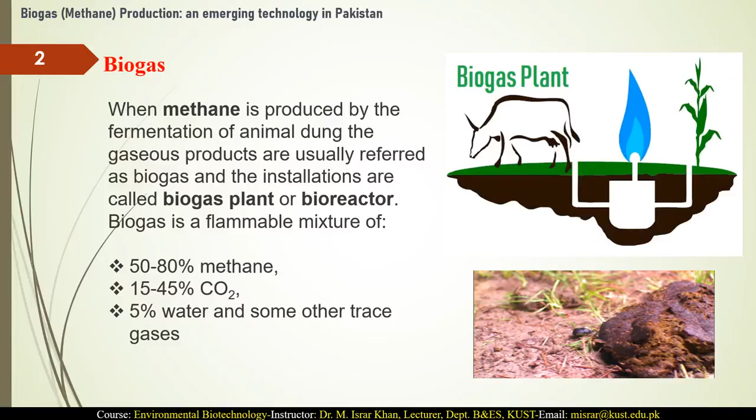So now we will talk about how biogas is used, meaning its utilization after production, specifically methane. Biogas, and specifically methane, can be burned in boilers as a natural gas, to warm water used domestically. Similarly, methane can be burned for electric and heat power production.

Methane has also been considered one of the important greenhouse gases. Methane produced domestically or commercially will be used for generation of electricity and heat for power production. Additionally, biogas after treatment can be used as fuel for vehicles.

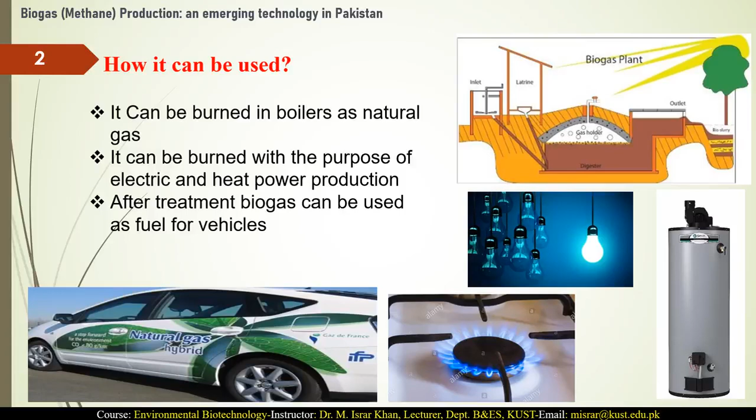As you can see in the diagram, biogas, and specifically methane, has various utilizations and functions. It can be utilized as natural gas for vehicles, used domestically for burning processes and heating, and burned in a boiler as a natural gas. So this is how biogas, and specifically methane, is utilized domestically or commercially.

As far as cows and methane production are concerned, there is a very deep correlation between cow dung and methane production, because of the methanogens. What are methanogens? These are archaean microorganisms that produce methane as a metabolic byproduct in anaerobic conditions. So methane as a biogas is produced anaerobically by this specific type of microorganism, which we call methanogens.

However, one thing I want to explain here: all ruminants, meaning animals having a rumen in their stomachs, have methanogens, archaean microorganisms involved in the production of methane, which is released to the atmosphere later. Methanogens work under anaerobic conditions, meaning in the absence of oxygen, which is facilitated by the rumen inside the cow's stomach.

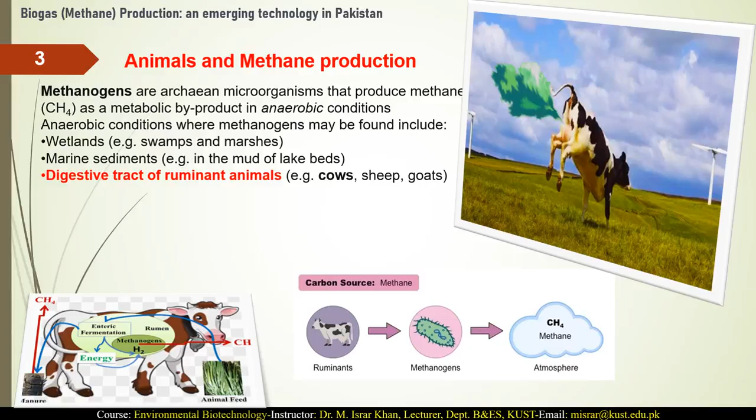We will discuss the exact mechanism of how we can produce biogas, and specifically methane, from fresh cow dung in our next slide, and what the mechanism is and how it will be produced, we will discuss in great detail in our next slides. So this is all about how biogas is produced, what the mechanism is, and what the definition is.

Biogas is usually produced by biomethanation, as we just discussed, as a result of the activity of methanogens, which are archaean microorganisms. So biogas is produced by methanation, by which organic material is microbiologically converted under anaerobic conditions and at a temperature around 30 degrees centigrade to biogases, and the byproduct specifically will be methane as a biogas.

So these are some of the restrictions to perform these biochemical reactions, where the methanogens microbiologically convert this organic material. Usually here we will talk about cow dung. So the specific or restricted conditions are the temperature, which will be around 30 degrees centigrade, just above room temperature, and the anaerobic condition, meaning the absence of oxygen is a must to carry out this reaction by a biological process. So it will be carried out by methanogenic bacteria or archaean microorganisms, and it will all be concerned with the production of methane as a biogas.

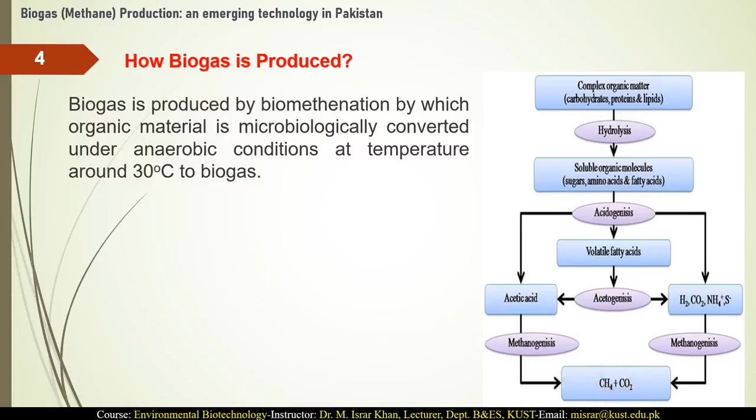So usually methanogenesis uses two pathways: either using acetic acid as a precursor or substrate, or the methanogens will utilize hydrogen, carbon dioxide, ammonium, and sulfur as a substrate. So these are the two separate pathways through which methanogenesis will occur, finally giving us methane and carbon dioxide as a biogas, which we utilize as a source of energy for various functions.

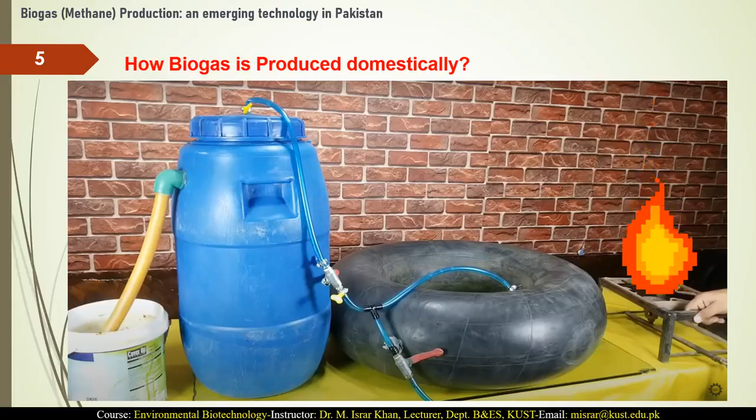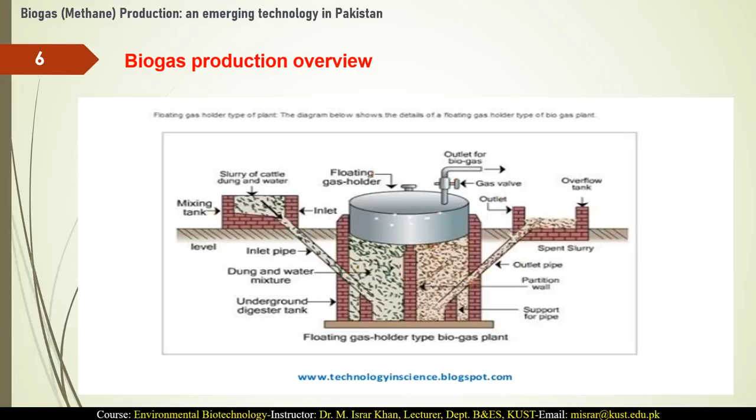So the biogas plant in actual is following the mechanism of anaerobic digestion, because it is a digestion of large complex organic molecules into simple soluble molecules, and that will be further subjected to methanogenesis, where methanogens will be involved by either using acetic acid as a substrate to produce methane, or utilizing hydrogen and carbon dioxide as a substrate to produce methane, which is our ultimate target.

So anaerobic digestion is where the oxygen availability is zero, meaning the methanogens work best in the absence of oxygen. That's why we usually call it anaerobic digestion. Anaerobic digestion is usually accomplished in three stages. The first one is solubilization, as I discussed in the previous slide, where the complex organic matter will be converted into soluble organic molecules. The second one is acidogenesis, in which the acidic compounds are produced from the soluble organic molecules.

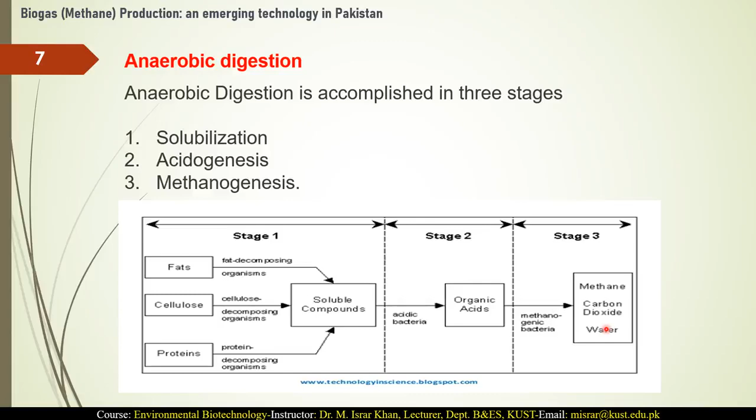And once we get these organic acids, in the third stage the methanogenic bacteria will convert the organic acids into methane, carbon dioxide, and water. So then we can collect this methane and carbon dioxide as a biogas, which will be further utilized domestically for fuel or energy production and electricity, etc., or it will be available commercially in the market.

So there are several advantages of the production of biogas. For example, it has been considered as a free organic manure. As I mentioned in the overview diagram, once we use the organic slurry, it could be utilized as a free organic manure that will be rich in nutrients and highly beneficial in the agriculture sector to replace chemical fertilizer as well.

And additionally, biogas can save lots of energy cost, because energy needs lots of finance and money to be produced. So this is one of the easiest ways, and with low cost we can save lots of energy. In addition, biogas has been highly considered to be pollutant free, and it will keep the environment clean. Additionally, biogas could also be used to generate electricity, which is one of the important factors that could impact normal human life.

So in addition to all these advantages, biogas technology allows quick production of biomanure, which is rich in organic substances, as I have mentioned. There are many other advantages in which we can compare biomanure with conventional manure. For example, its form of availability, nutrient balance, and high level of organic matter, which is powerful energy material for soil microorganisms. So the manure which has been utilized in the production of biogas could be utilized as a green manure, as an organic manure.